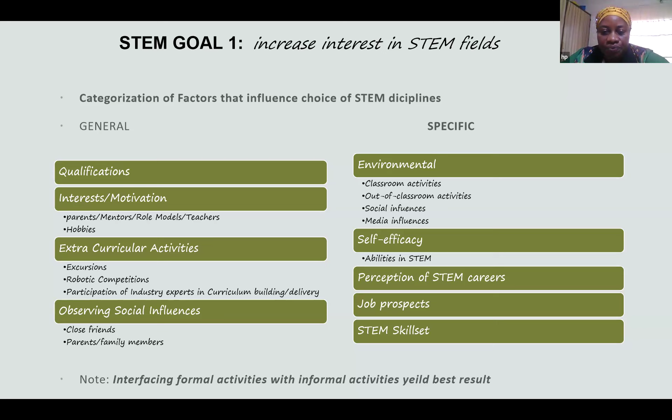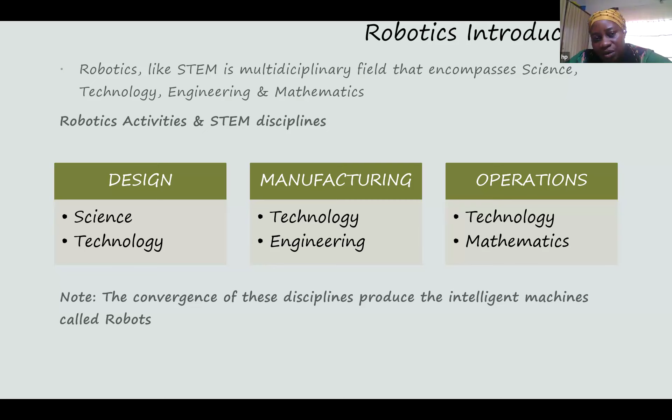Looking at robotics again, generally it's kind of related to what STEM consists of. So my job today is to emphasize the role that introducing students to robotics early in their education can play in their coming into STEM, or having interest in STEM disciplines.

So I've explained how, in the content of robotics - the design aspect, the construction aspect, the computation and programming aspects of robots - there is no age limit and no young age too early for learning robotics. We've seen children in primary schools doing a lot with robots, and with that, it will be difficult for them to deviate from or avoid going into STEM disciplines.

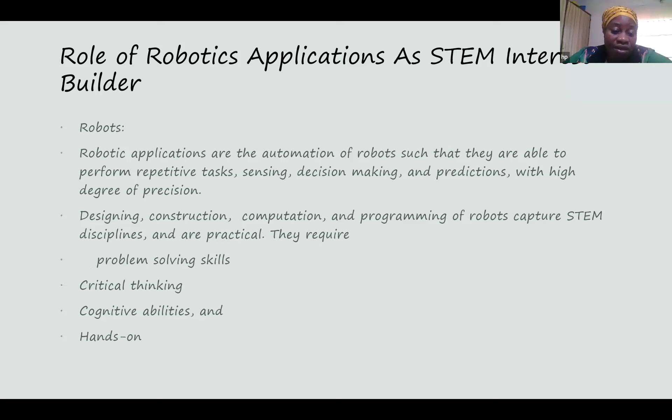Now with robotic programming or engineering, we have problem-solving skills. It also involves cognitive abilities, critical thinking, and a lot of hands-on work.

There is an algorithm that plays a lot of roles in perfectly programming a robot. When we talk about precision and smoothness, like in animation, we look at the number of frames per second - a smooth animation has 24 frames in one second, delivering smooth visual effects. Similarly in robotics, we have the proportional part, the integral part, and the derivative part.

Together we call this the PID controller. Each of the proportional controller, the integral controller, and the derivative controller plays a great role in delivering a smooth movement of the robot.

In robots, we talk about precision, embedding intelligence that can be likened to human intelligence into a robot. There's no way a robot can be moving jerky and wobbling and still be considered a perfect robot. So the PID algorithm is used to deliver a smooth effect, reduce the error, and ensure precision. It can also help predict future behavior of the robot.

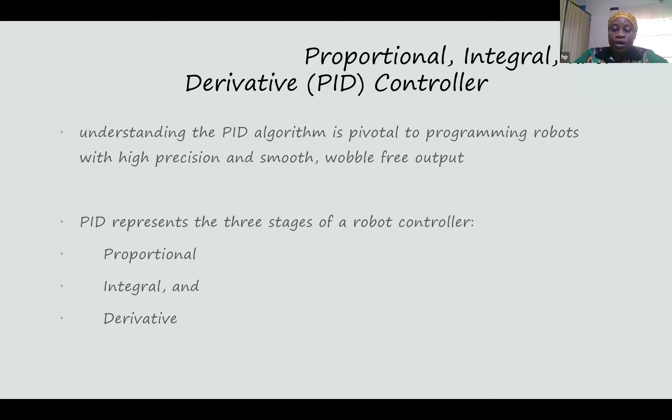So this is where I'm going to be dwelling my presentation. Permit me, I have some tools I used for this work. Some of the terminology you'll hear me say here is 'error', which is a measurement of how far a robot is from its intended position.

We've heard about self-driving cars - it's this same algorithm that can be used in self-driving cars, because it measures the distance to where the car is moving, say to a stop sign somewhere maybe 2-3 kilometers away. So it takes a record of the distance and names that as error, and it also takes a record of the present location or status of the vehicle itself.

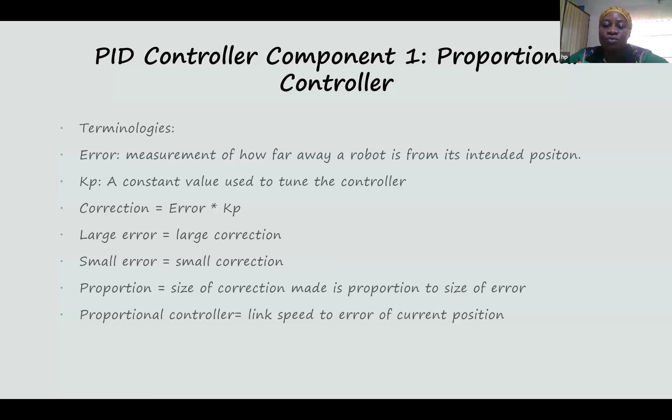Between the present location and the intended position of the vehicle, it measures that as error. The proportion or size of the correction is proportional to the size of the error. That means if the distance is 50 km to where the vehicle wants to move, the speed is given at 50 kilometers. So the closer it draws to its destination, as the speed keeps reducing, let's say it gets to 25 kilometers to its intended target, then the speed goes to 25, until it gets to maybe 0 kilometers, the speed also gets to zero. That's where you now have the car stop just before where it intends to arrive at.

That's for proportion. Then we have the second part, which is the integral part of the PID controller. The integral part sums up all the errors that the robot encounters during its runtime, and it uses this summary or integration to understand whether the robot is tending towards a positive, and that becomes a trend. Once it uses that trend, it can determine that since it's going towards the positive, it is possible next time it will go towards the positive. So any decision being made can be made towards the negative direction, so that if it deviates from its track, the negative decision can bring it back to track. So this is just how it works.

A constant value called KI is used here to tweak and tune the robot, like give it a constant value of 2, a constant value of 3, keep testing it until you get the perfect, precise tuning that will deliver a smooth effect.

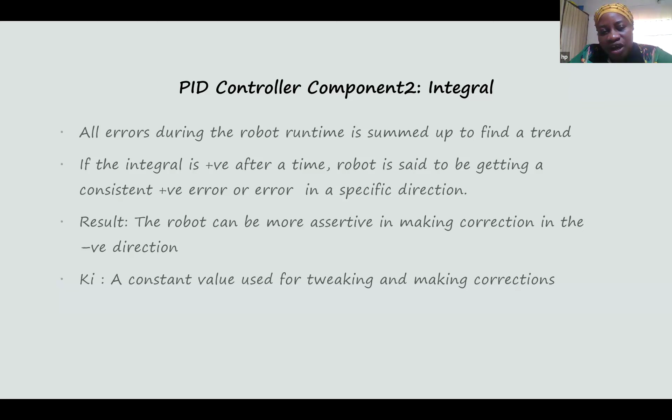So the third part now is the derivative part. The derivative part has to do with taking in the present error, and measuring that together with the immediate past error. These two errors put together are now used to compare with the last measured error. Let's say I measured my error 3 hours ago. Now I'm taking in my status, taking in the immediate, that's the error of my present. Remember, error is considered the distance away from the target or targeted position. So let's say I'm at 0 and I'm going to the next 25 kilometers, so my error becomes 25.

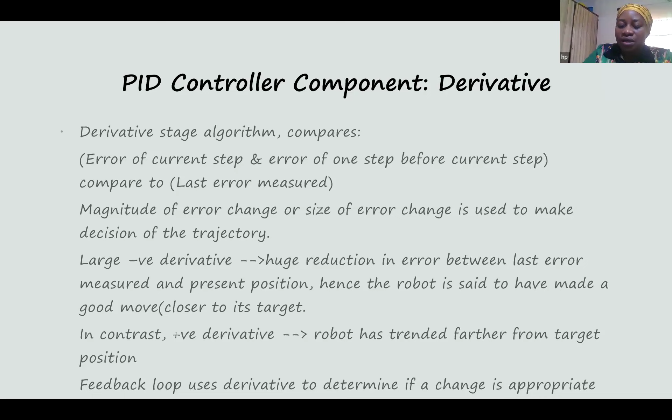So in derivative, you're looking at the immediate past error and the present error. These two combined will be used to compare to the last measured error. The intention is to make predictions. This is not intended to correct the move, but its intention is to make predictions. Like when we talk about machine learning, intelligent systems learn from previous activities. So this is more like the robot learning from previous errors it has encountered, immediate past and present error being used to compare to the result of a previously measured error. With that, a decision can be made: since it moved to the right, possibly next time it can move to the right. So I should program the robot that at this point, when it goes 10 kilometers, it should actually start moving towards the left. It's like a feedback loop that is used to make forecasting or make decisions for future trends.

Our role here is that we advocate that younger children should be exposed early. We have robotic applications that you don't have to buy robots for. Like the one I'm using now is a virtual robotic environment for programming these without having to spend the money. I checked the price of the robotic toolkits, and in my Nigerian currency it's about 655,000. That's a whole lot. But with a virtual environment, you still have access to all the actuators and all the robotic parts that the physical robots have.

You're provided with previous competitions, you can test and tweak. You have another program software called Lego Mindstorm, which is what I'm using to write the program, and then I'm testing them in a virtual environment. That's the virtual robotic toolkit, yes.

I think we can bring this as part of the curriculum for primary schools and secondary schools, so that we can bring back the mind. I've seen so many students in the lower classes, before they get to higher institutions, and when you ask them, they're not interested in STEM, they say it's difficult.

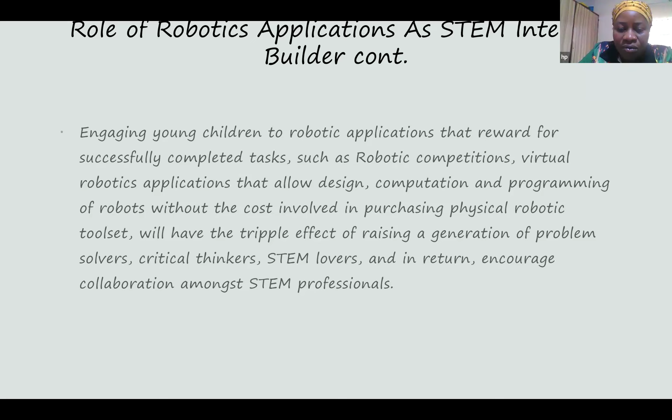I believe the maths you see me carry out here will be of a lot of interest, and the physics also, where the sensors will actually be able to sense light, sense color, sense sound. I think it's so interesting that the younger ones will find something to engage with, and at last I believe they will all be motivated to make choices in the STEM field. Okay, this is my environment, but instead of taking all day, let me just run my demo, and then maybe I'll come back and summarize.

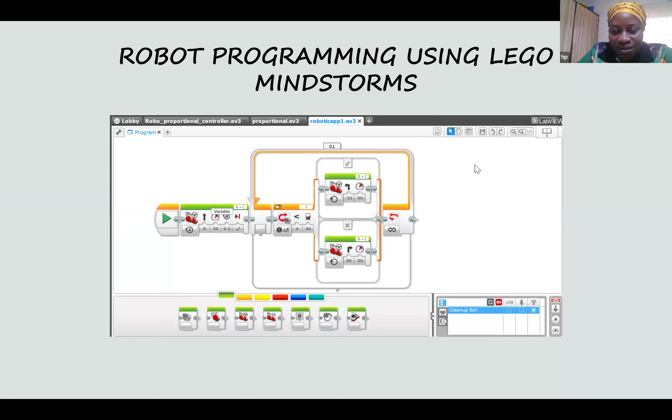Mm-hmm. One minute, let me run my demo. Okay.

Hello, can you see my screen now? Yes ma'am, we can. So this is the Lego Mindstorms programming environment, EV3 programming environment, and this is what I'm using to run my program.

Maybe for want of time, I don't have all the details, I'll just explain what I have here. If you look at my mouse, follow the mouse, you see where I have the green button there. Clicking on that is for action. Action means a function. In programming, when you want to execute a task, you use a function.

So in this programming environment, we have the medium motor, which we basically use here for the steering. The steering is to move the robot into a particular direction. So after the play button I have here, I'm using the steering component to initialize the movement of my robot.

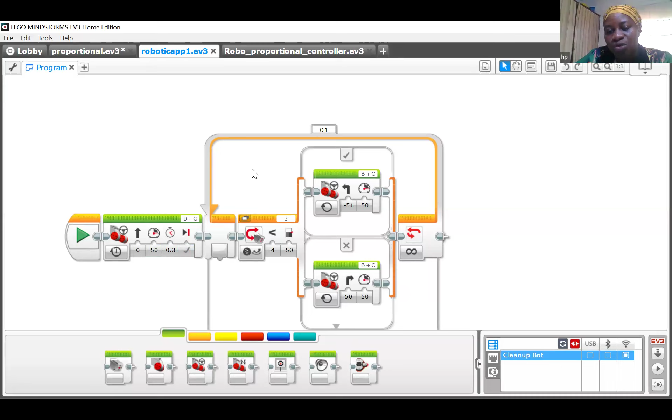Then a loop is used. Now we know that robots are all about repetitive tasks. They are used where repetition of tasks is highly required, and we already have the definition of the task that must be done. So if you write the program and use a loop to repeat as you like, the robot is now embedded with this program, and the robot can actually learn from it and be able to repeat such tasks.

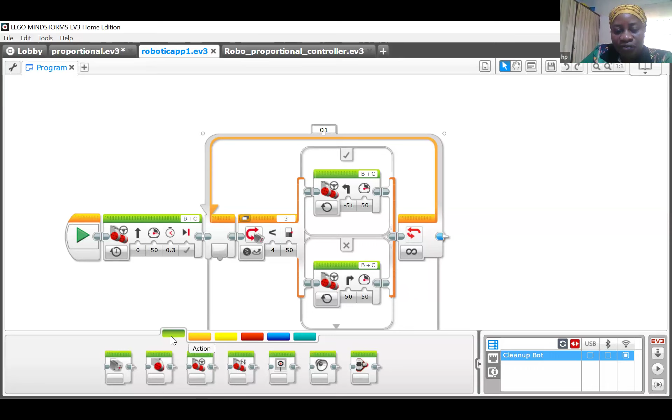So a loop is used here, and to get the loop, remember the first one is for action, so I use the first one because I needed the steering to move. That's a function. Now the second one is for my flow control. Under the flow control, I have the first big block, which is a loop, while the second one is a switch. So the switch has its own functions.

You see when I apply the switch, the loop comes first, and every other thing that happens in the robot programming will happen inside the loop, so that all the programs, all the activities, all the functions can be repeated as frequently as I need it to be. So immediately after the loop, the next thing I have is a switch, which I can use for conditional testing.

Let me show you this. Once you bring up the switch, clicking here, you can see my sensors. All inside the switch I have brick buttons, color sensor, infrared sensor, motor rotation, the timer, touch sensor, messaging, text, logic, and numeric, and so on. We have all these inside the switch. So right now, what I need, because the program I'm trying to execute here is for the robot to determine a path.

I want it to follow a particular route, and the line on that route is marked in black. So I'm going to use a sensor and ask the robot to give it the color range that it must see. And also, let's go ahead.

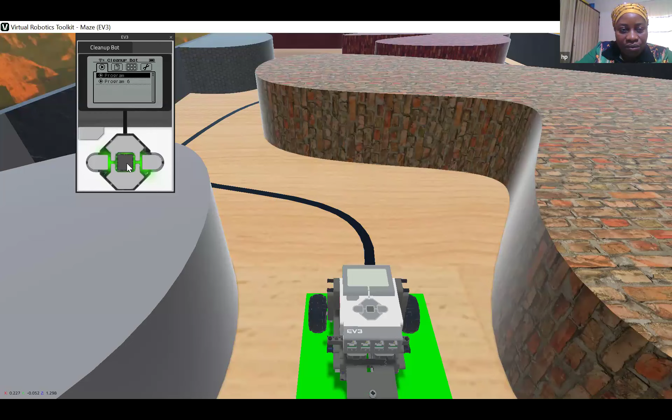And this would be for a repetitive task where it can transport something. It's now wobbling a little because I've not implemented the PID, but this is how it works. The wobbling is not much, but with the PID, you now bring in the proportion, the integral part, and then the derivative. With that, it won't wobble.

It gets the target, and the challenge is to get to the red carpet and then stop. Keep following the line, don't deviate. Now, without this program, you see that it goes off. So implementing the PID is for precision. It helps you to take decisions and to make predictions for future movements.

So please let me quickly go to my PowerPoint and show the view of the PID. There was a question in the chat asking you to explain how the PID relates to robotics. I'm going to do that right away, immediately, for the person who asked that question. I hope you're listening.

Now, this is how the PID works. Like I mentioned earlier, it has 3 stages. The first stage is to measure the proportion of the distance and then name that as error. So it's assumed your present position is zero, but wherever you're going is an error. With that error, it kind of creates a trend for the robot to follow, and it's able to determine the distance.

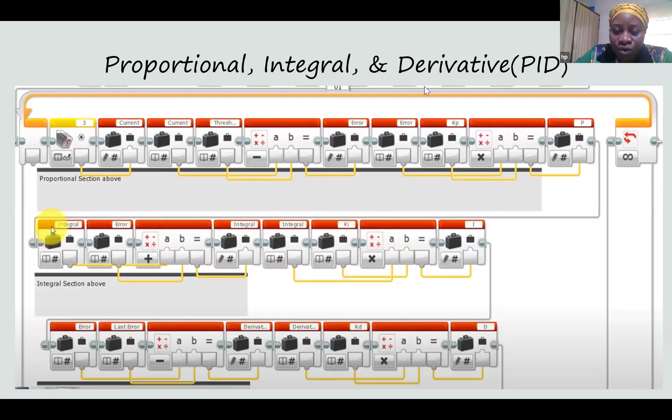The question asks what are the applications of this model in engineering design. Engineering design has other simulators, but here we can design full robots using these environments. When you talk about the robot, you have the actuators, sensors, and all the parts of the robot. You can build a physical robot, or go online and find a robot design you like and want to build something similar. You can come to this environment, find the components or characteristics of that robot, and work in this environment to develop your own robot. The one I just used is one I downloaded, and I was able to write and embed programs into it, then simulate it. So engineering students can actually build their own robots virtually. If you don't have resources to build a physical robot, you can at least build one virtually and still program the characteristics of that physical robot and have it work.

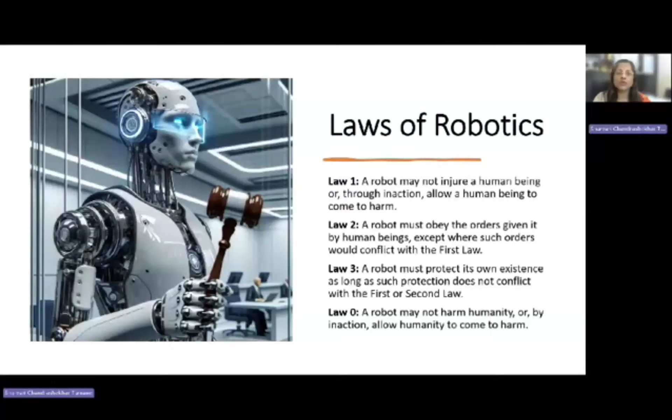The zeroth law came later: a robot may not harm humanity, or by inaction allow humanity to come to harm. Asimov added this overarching law to prioritize the safety of humanity as a whole, even above individual humans. So this covers all the laws of robotics.

Let's see the core components that form the foundation of any robot. No matter the complexity or purpose, every robot is built from a few essential elements that enable it to operate efficiently. The first part is sensors. These allow robots to gather information about their surroundings, such as cameras for vision, touch sensors, or ultrasonic sensors for distance measurement.

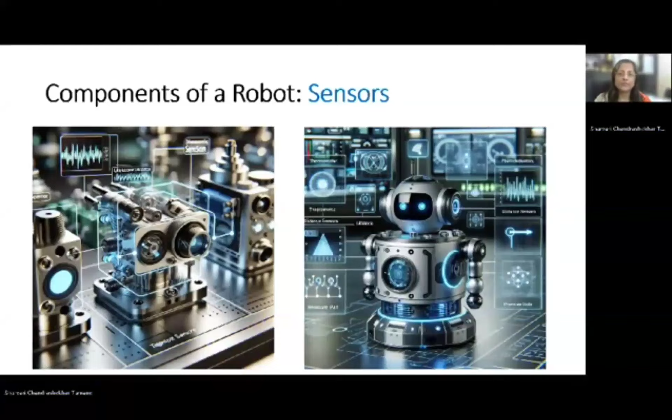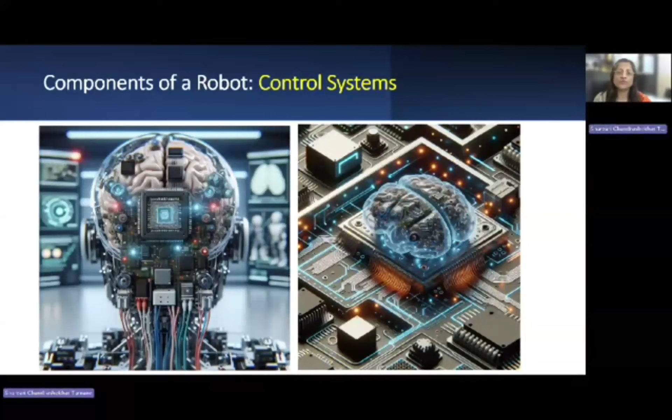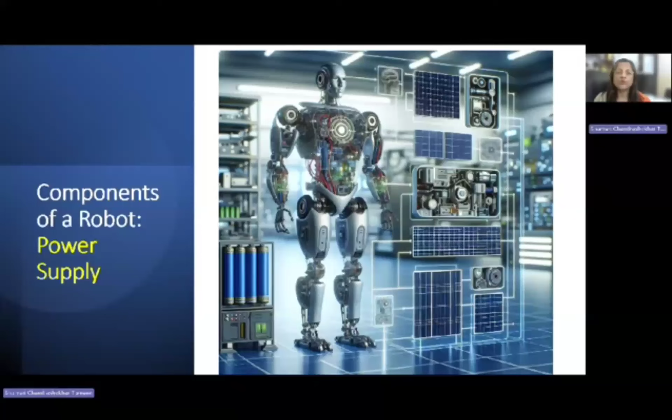Actuators are components that facilitate movement and manipulation, typically through motors or hydraulic systems. Control systems, often referred to as the robot's brain, process input and make decisions using programmed algorithms, typically run by a computer. Power supply provides the necessary energy for the robot to function, whether through batteries, solar panels, or other sources. End effectors are tools or devices attached to the robot, like grippers, welding torches, or drills, which enable the robot to interact with the environment. This covers the different components essential to creating any robot.

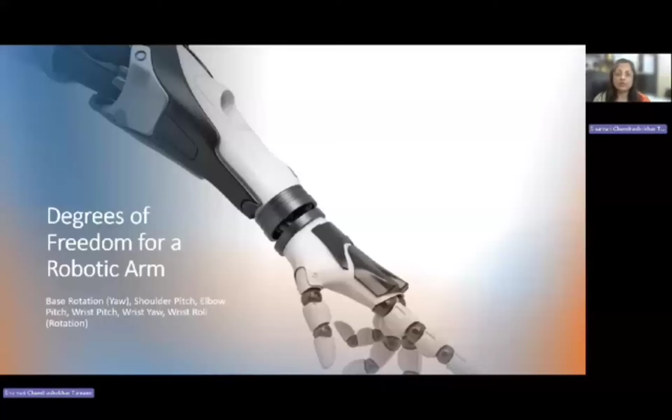Next is the degrees of freedom, or DOF. The DOF of a robot arm refers to the number of independent movements or joints it can control. Each DOF corresponds to a distinct motion or rotation in a specific direction. The common degrees of freedom in a robot arm are the base rotation, which allows the entire arm to rotate left or right around its vertical axis, enabling broad directional changes; the shoulder pitch, which controls the up and down motion of the shoulder joint, similar to how a human arm raises at the shoulder; and the elbow pitch, which bends the arm at the elbow, allowing it to move closer to or farther from the body.

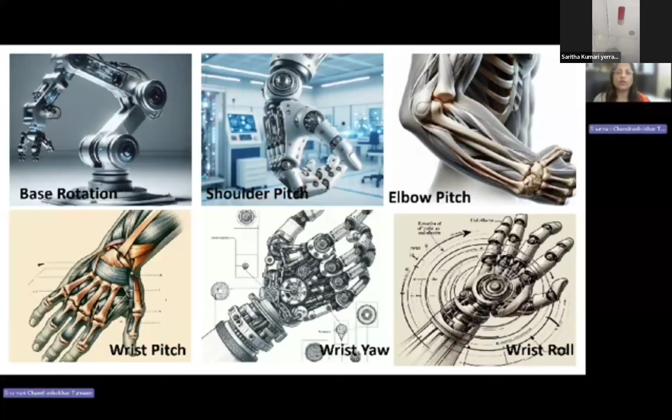Then the wrist pitch, which provides up and down movement, aiding precise positioning, and the wrist yaw, which adds left and right rotation of the wrist, letting the hand or tool twist horizontally. Lastly, the wrist roll allows rotation around the forearm axis, akin to twisting a doorknob, giving the end effector or tool the ability to rotate for enhanced control.

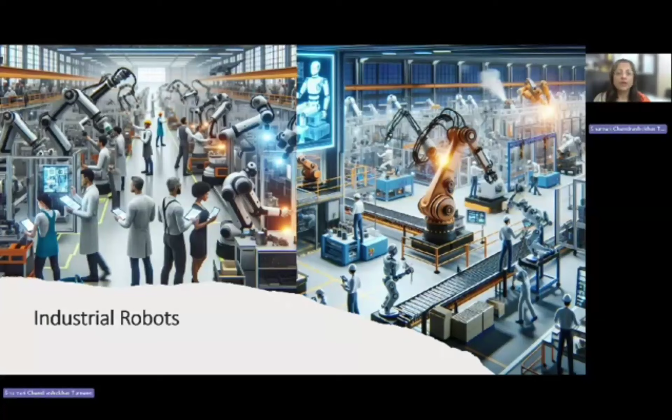There are different types of robots available, coming in different forms and functionalities, each designed to serve specific purposes across multiple domains. We'll see first the industrial robots. Industrial robots are automated machines used primarily in manufacturing environments. They are designed to carry out repetitive tasks with high precision, speed, and reliability. Common applications of this are welding, painting, and assembly.

Okay, that is as much as I have for the video. Apparently the rest of it is not recorded. So do you have any questions on what was presented by Dr. Tamane? I think she sort of reinforced what Dr. Comfort shared, but if you have any questions, I'm sure Dr. Comfort would be able to shed light on that.

Dr. Comfort, are you still there? Yes, ma'am, I'm here. Okay, do you want to share a little on what Dr. Tamane shared, and maybe highlight the fact that we have a female panelist this time, and the trend of more women going into robotics and STEM.

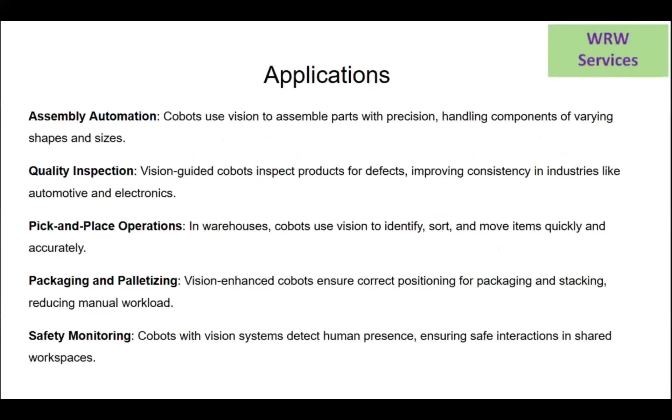Cobot applications with vision systems. Cobots, or collaborative robots, are designed to work safely alongside people in various industries. By adding vision systems, these robots can see their surroundings, allowing them to perform tasks like checking product quality, sorting items, and putting things together. For example, they can inspect products for defects or measure dimensions accurately. Cobots are easy to program and can adapt to different tasks, making them valuable in manufacturing, packaging, and logistics. With vision systems, they help improve efficiency and precision in many workplaces.

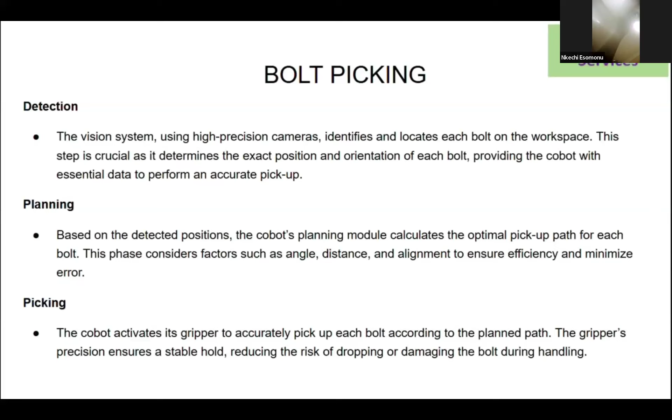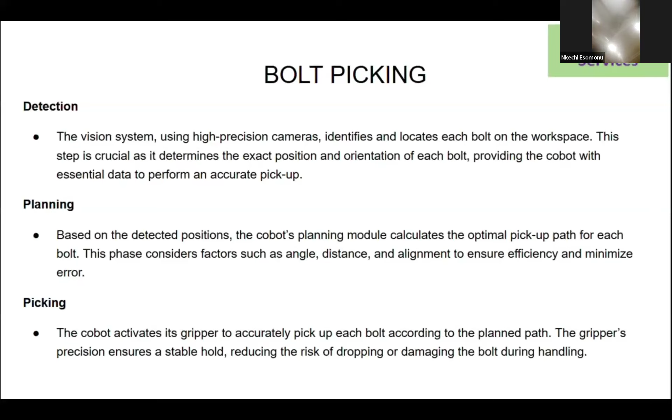Bolt picking. This bolt picking application is for Sundaram Fasteners, a manufacturing company specializing in bolts and fasteners. In this application, they need to pick a bolt from a cluttered bin and place it in a thread rolling machine for threading, then move it to a destination within a 4-second cycle time. We developed a solution that involves setting up a cobot, a vision system, and a customized algorithm for the pick-and-place operation of the bolt. We set up the vision system, a camera that will help the cobot identify and locate the bolts. Proper lighting is essential to reduce shadows and reflections, enhancing visibility.

Then we calibrated the camera to define its intrinsic and extrinsic parameters. Similarly, we calibrated the cobot's arm to guarantee precise movement and positioning. Using deep learning-based algorithms, such as YOLO, faster RCNN, or SSD, we identify and locate the bolts within the image. These algorithms leverage neural networks trained on vast datasets to detect objects with high accuracy and efficiency.

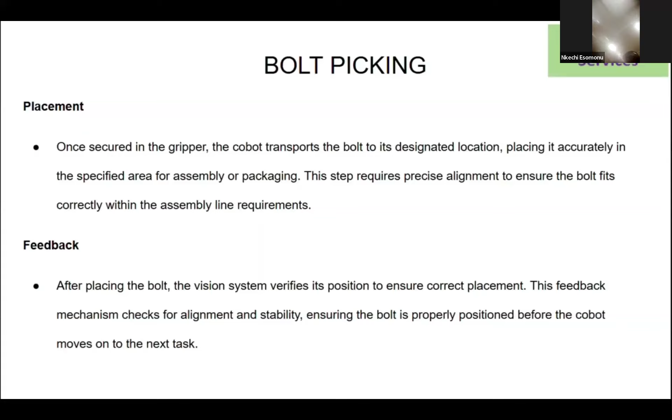The cobot moves to the first bolt's position and engages the gripper to securely pick it up. After that, it navigates to the designated drop-off location and releases the bolt. This process continues for each clustered bolt, with adjustments made to the trajectory as needed. This comprehensive workflow enables a cobot equipped with a vision system and deep learning-based object detection algorithms to efficiently pick and place bolts. By leveraging advanced technology and structured processes, we enhance productivity and adaptability in real-world environments.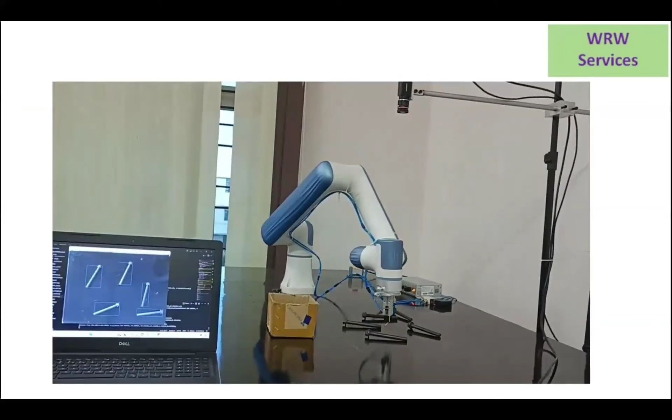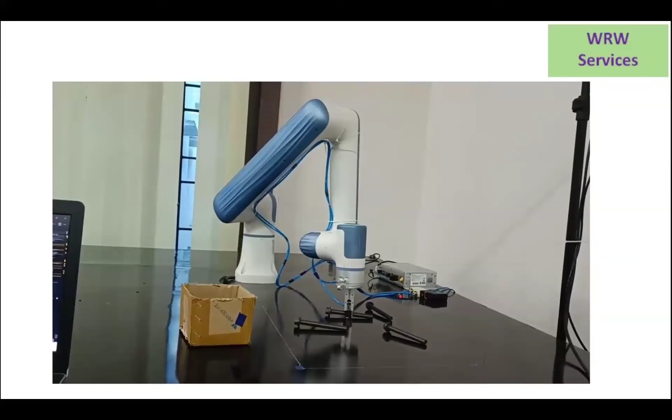As we begin, we see a table filled with various bolts. The vision system camera scans the entire table and takes a single picture of all the bolts, capturing their positions and orientations. Next, we watch as the collaborative robot, or cobot, comes into action. Using the information from that one image, the cobot quickly identifies where each bolt is located. With precision and speed, it picks up the bolts one by one, carefully grasping each one. The cobot then places each bolt into a box, ensuring they are stored safely and efficiently. This process showcases how the camera's single image allows the cobot to pick and place all the bolts in just one smooth operation. It highlights the effectiveness of combining a vision system with robotics, making assembly tasks faster and more reliable.

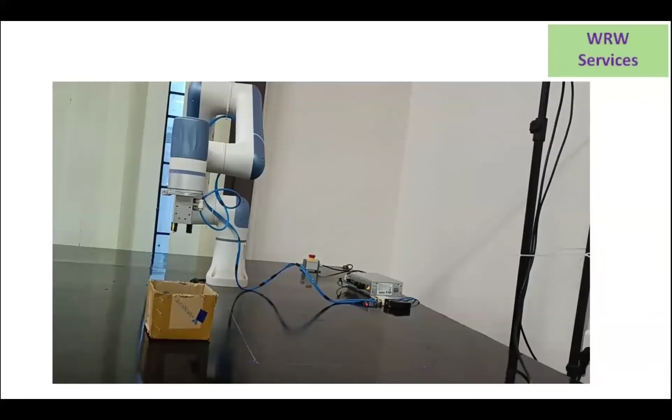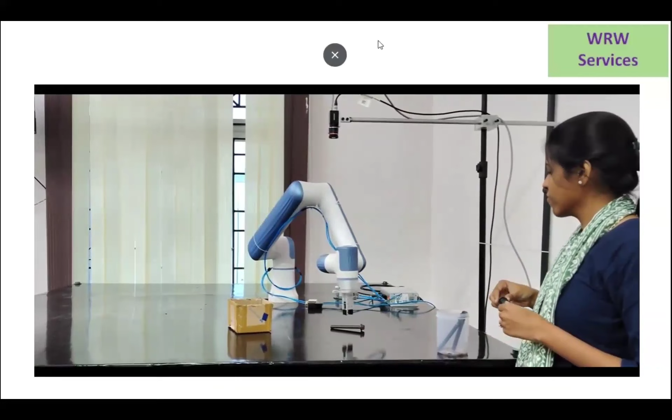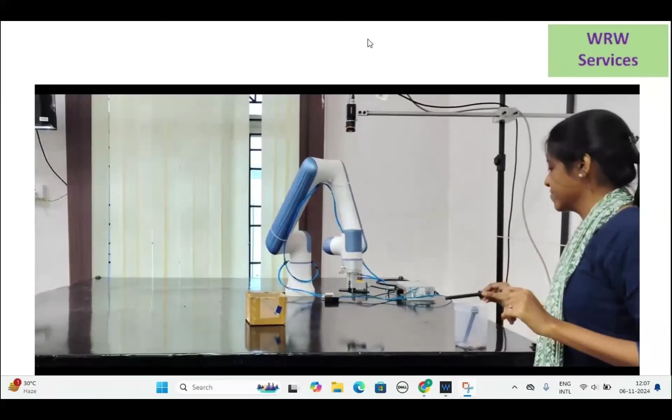In this part, we watch the cobot continue its work of picking and placing bolts. After putting each bolt in the box, the cobot uses a special algorithm to take a picture of the next bolt. As soon as the last bolt is placed, the cobot's camera captures a clear image of the next one. This helps the cobot see exactly where the bolt is so it can pick it up easily. The process is quick and smooth, with the cobot going straight from placing one bolt to getting ready for the next one. Each picture helps the cobot move accurately, ensuring that every bolt is handled carefully and correctly. By taking a picture of each bolt right after placing the last one, the cobot shows how smart technology can make assembly work faster and easier.

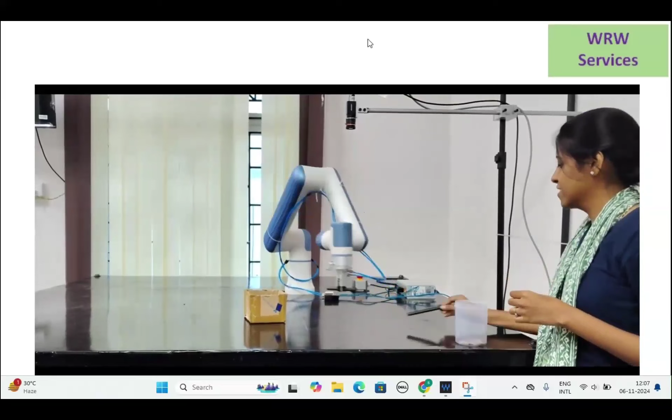Sequence analysis. This project is for Panasonic. They had an issue with mismatched boxes and the products inside them. We provided a solution using a single camera mounted on a cobot, which checks the attributes of the boxes and ensures the quality of the packing process. In this application, a camera is mounted on the cobot to enhance its functionality during the quality control process. The cobot approaches the designated box and begins by scanning 3 sides of the container, each containing important information.

The first side features a label with the MRP, maximum retail price, and the model number, which the optical character recognition (OCR) system reads to verify accuracy. Next, the cobot scans the second side, which displays a barcode, using the camera to decode and validate the information. Finally, the third side is examined for a QR code, ensuring that the details encoded within are correct.

The algorithm processes the data gathered from all three sides, cross-referencing the MRP, model number, barcode, and QR code to confirm they match the expected values. This meticulous checking process allows for immediate identification of discrepancies, ensuring that only correctly labeled boxes proceed through the production line. By integrating the camera with the cobot and employing advanced recognition algorithms, we significantly enhance quality control measures, reducing errors and improving overall operational efficiency. This seamless interaction between the camera and the cobot exemplifies the effectiveness of combining vision systems with robotics for enhanced reliability in manufacturing.

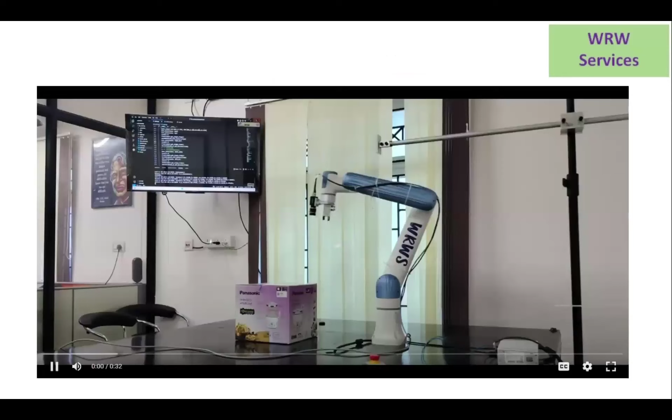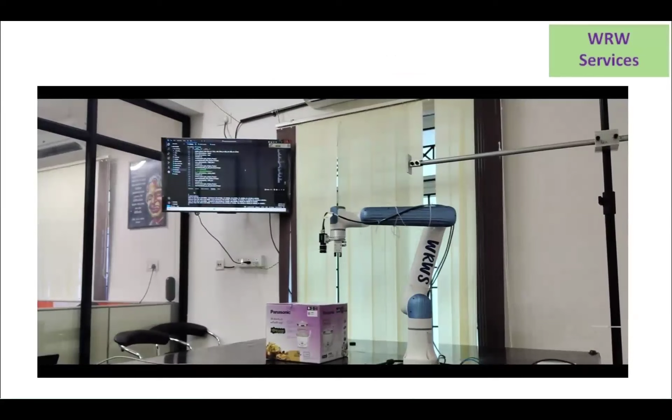The cobot is equipped with a high-resolution camera that scans all four sides of the box. First, it uses optical character recognition (OCR) to read the MRP and model name label. Next, it scans the QR code for additional product information. On the third side, the camera captures the product name using OCR, ensuring accurate identification. Finally, it scans the barcode, verifying product details against a database. This efficient scanning process ensures that every box is correctly identified and verified for quality control.

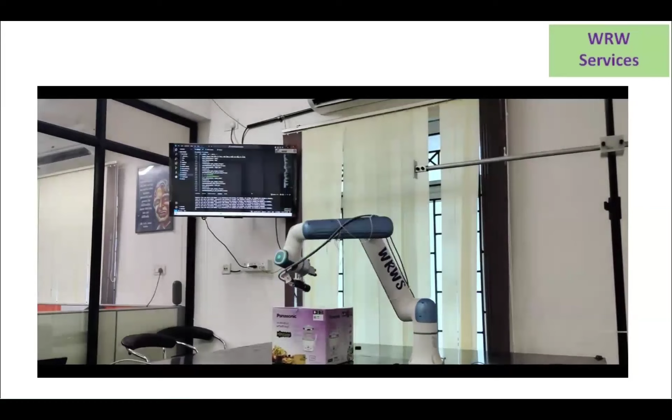Box palletizing with cobot. This project is for Panasonic. They had a requirement for automation in the box palletizing process after packaging. We provided them with a solution using a cobot equipped with a vision system and a vacuum gripper for automation.

In this application, a cobot with a camera mounted on top is used to pick and stack boxes efficiently. As the cobot moves to the area, the camera looks around to find the boxes that need to be picked up. With its vision system, the cobot can see the boxes and understand their size and position. Once it identifies a box, the cobot uses a vacuum gripper to pick it up. The vacuum gripper creates a strong suction to hold the box securely, preventing any damage.

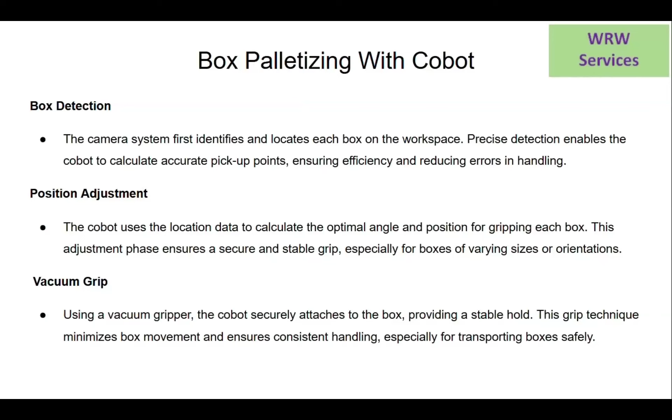After lifting the box, the cobot moves to the designated spot and carefully places the box down in the right position. This automated process speeds up how boxes are handled and ensures they are stacked correctly on the pallet. The combination of the camera and the cobot, along with the vacuum gripper, shows how robotic solutions can make logistics operations faster and easier, reducing the need for manual labor in warehouses.

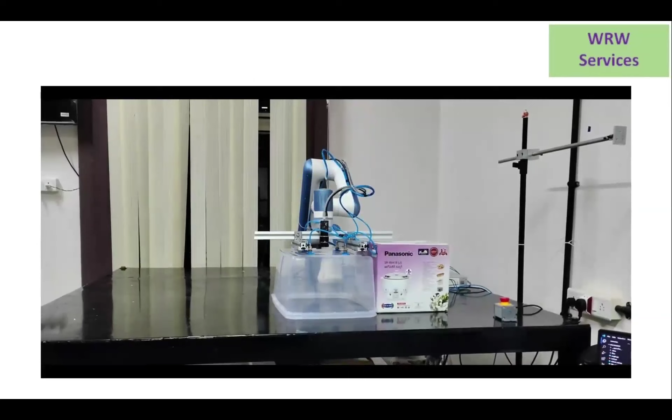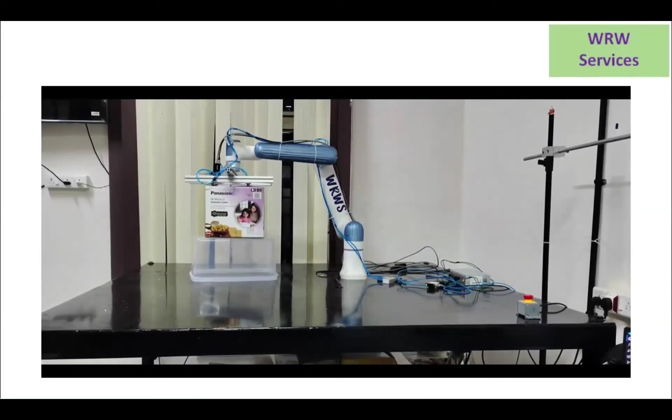The cobot approaches the box, guided by its advanced vision system. It quickly identifies the box's position and orientation. Using a precise algorithm, the cobot moves in and activates its vacuum gripper. With a secure grip, it lifts the box and smoothly stacks it in the designated location. This efficient process showcases the power of automation in optimizing workspace organization.

Pan pick and place. This project is for Panasonic. They had a requirement for automation in a pan manufacturing unit. We provided the solution with a cobot with a vacuum end effector to pick and place the pan.

In this application, a cobot equipped with a vision system is used to pick and place pans in a manufacturing unit. As the cobot approaches the work area, the vision system scans the surroundings to locate the pans that need to be moved. With its advanced camera, the cobot can accurately identify the pans and determine their size and position. Once a pan is selected, the cobot uses a vacuum gripper to lift it. The vacuum gripper securely holds the pan in place, ensuring it doesn't slip or get damaged.

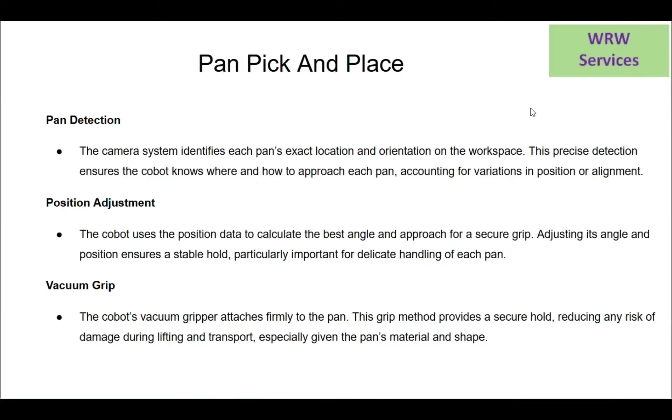After picking up the pan, the cobot navigates to the designated location and carefully places the pan where it is needed. This automated process helps improve efficiency in the manufacturing unit by speeding up the handling of pans. The combination of the vision system and the cobot, along with the vacuum gripper, demonstrates how robotic technology can streamline operations, making tasks easier and reducing the need for manual labor.

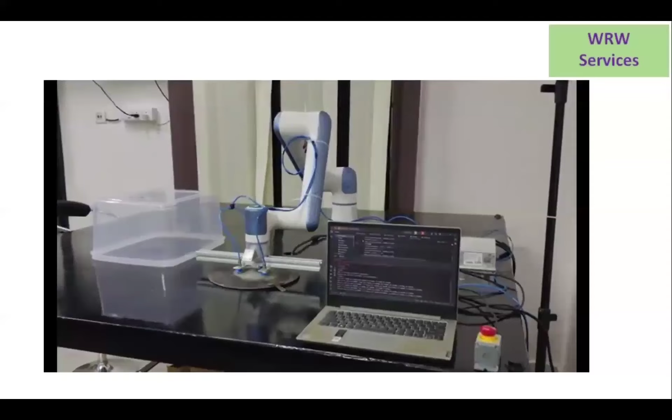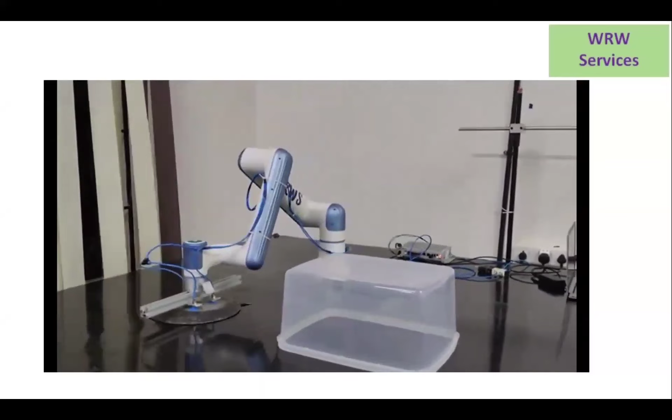In this demonstration, we see a cobot equipped with a vacuum gripper. The process begins as the cobot identifies the pan on the surface. It carefully positions itself above the pan, ensuring optimal alignment. Next, the vacuum gripper activates, securely lifting the pan with precision. The cobot then moves smoothly to the designated location, navigating its path with confidence. As it approaches, the gripper gently releases the pan, placing it exactly where needed. This efficient pick-and-place operation highlights the capabilities of collaborative robots in automating tasks with accuracy and ease.